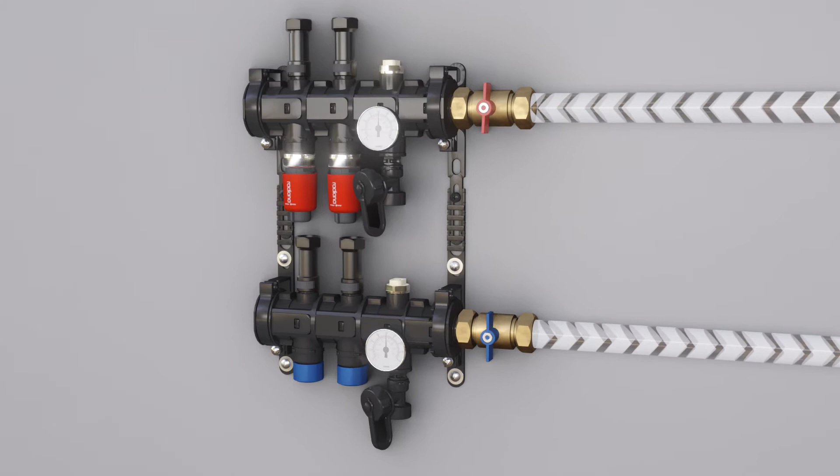The Radiana modular range of heating and cooling products comprises a full ceiling panel which can be divided into a square half panel, and a separate slim panel which needs to be divided into two slim or quarter panels. A modular composite manifold with isolation valves gives you full control over each zone. Fully insulated pipework and our unique push fittings allow for easy installation.

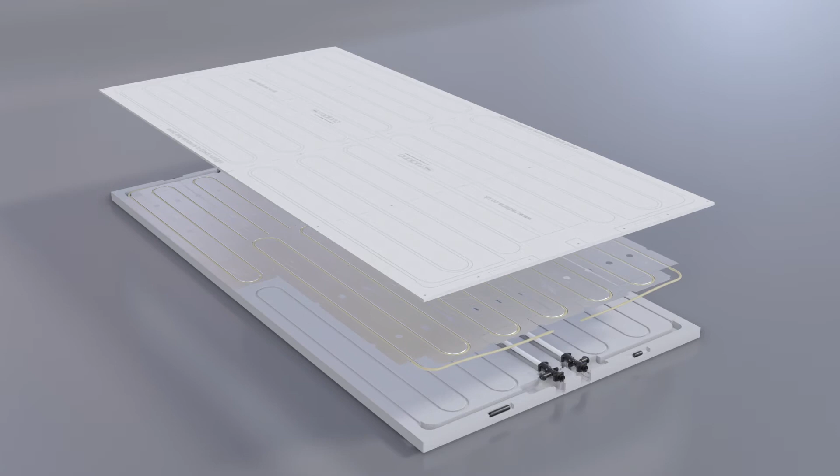Radiana provide a panel layout design service, which clearly shows the custom layout for your install and the position of each component. Each panel has integrated pipework, push fittings, insulation and drilling guides for easy installation. When your panels arrive on site, they can be cut in various ways.

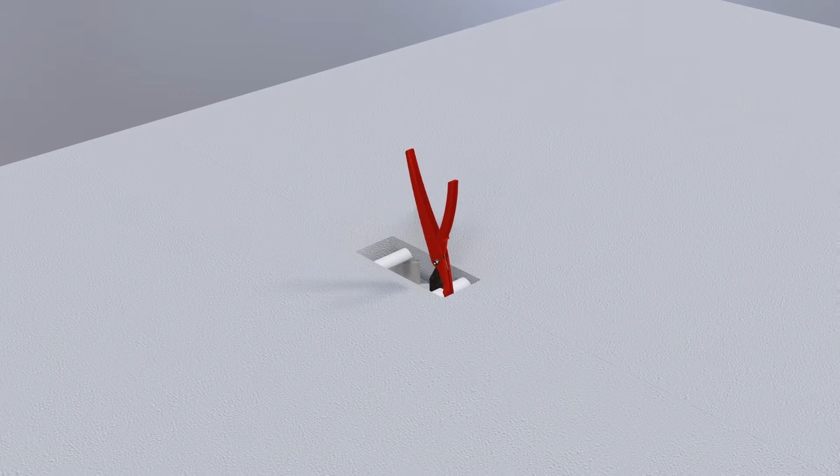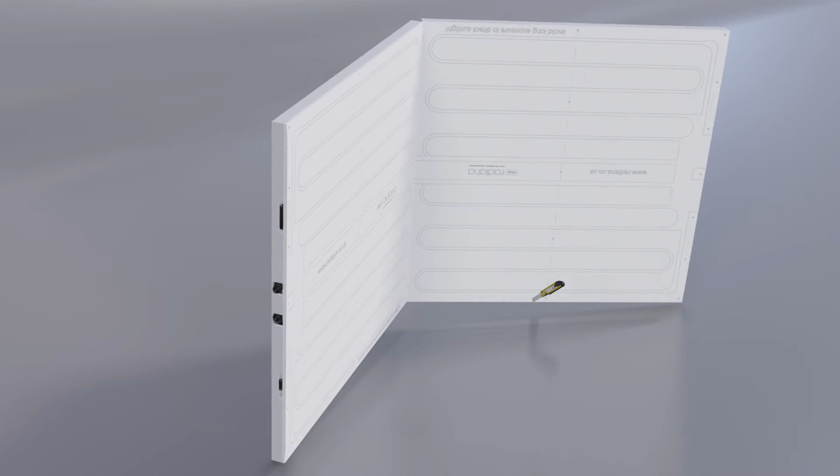The full panel can be cut in half to make two square half panels. Remove the window opening in the insulation to reveal the pipework and cut the pipework with pipe cutters. Make a pre-incision through the insulation up to the paper lining. Fold the panel away from the cut and with a blade cut along the paper lining to separate the two halves. The full panel will make two square half panels.

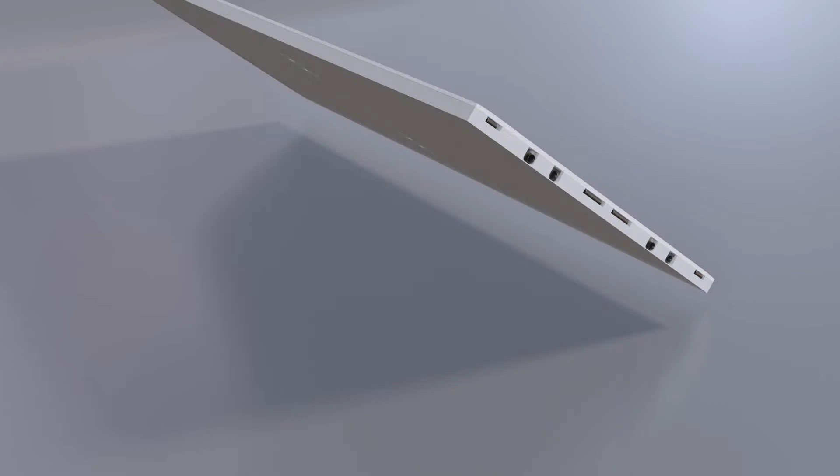The separate slim panel needs to be cut in half lengthways to create two slim panels. Without disturbing the pipework, make a pre-incision lengthways through the insulation up to the paper lining. Fold the panel away from the cut and with a blade cut along the paper lining to separate the two slim panels.

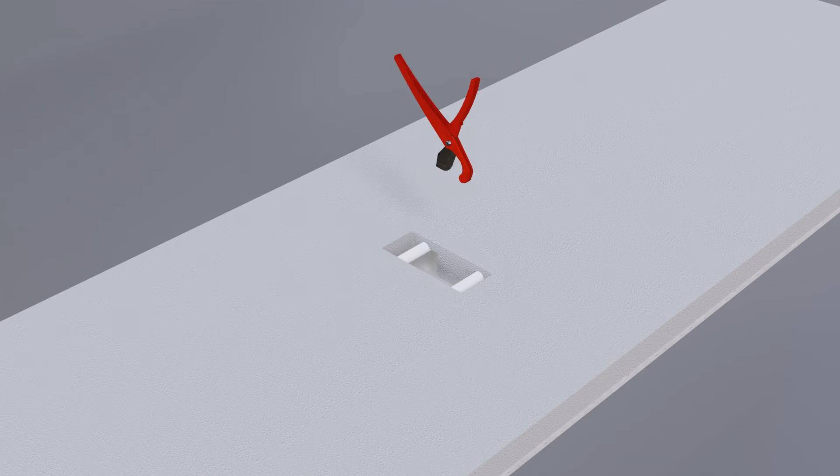To reduce a slim panel into quarter panels, remove the window opening in the insulation to reveal the pipework and cut the pipework cleanly with pipe cutters. Again, cut through the insulation to the paper lining. Fold and cut the paper lining, making two smaller quarter panels.

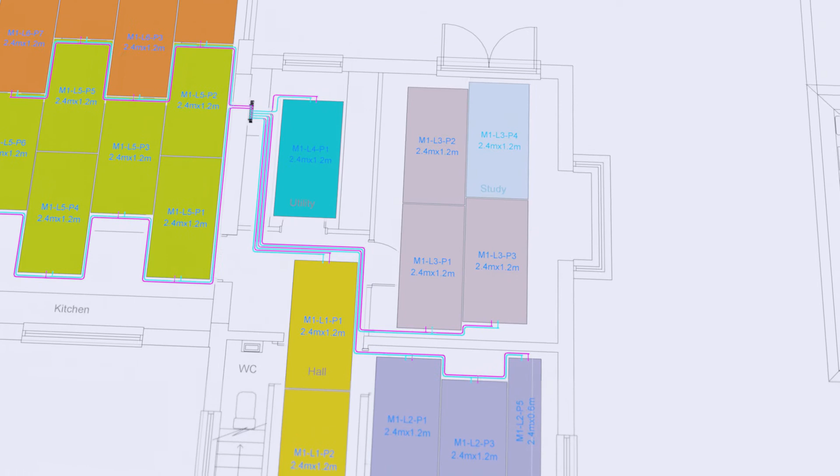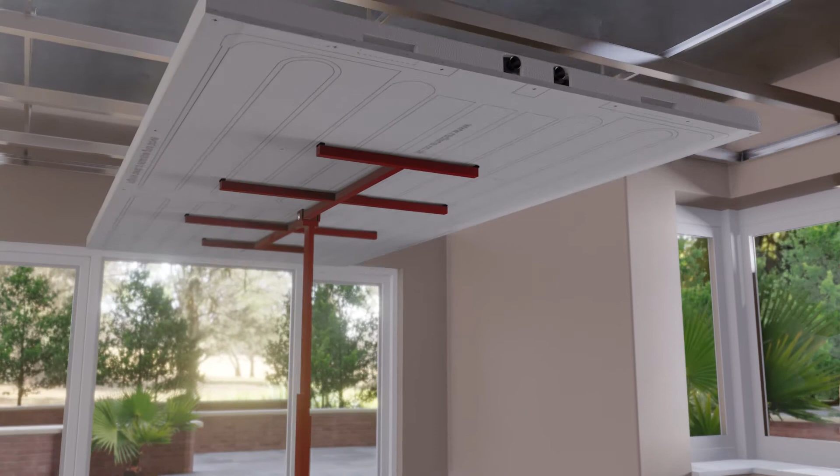Always start with the panel furthest from the manifold. Lighting and penetration layout should be planned prior to installation by the installer. Remove the artery stop plugs and push firmly into the panel pipe ends furthest from the manifold. Lift the first panel into place onto the ceiling grid and fix with 35 4.5mm by 75mm drywall screws. Make sure that the screws are evenly spaced across the panel, taking care not to puncture the marked internal pipework.

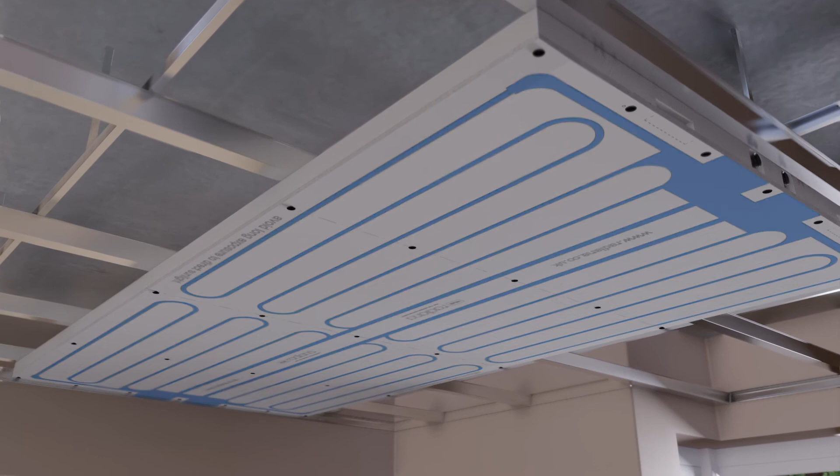The second panel should be prepared prior to lifting, with the straight-through sleeves inserted on the nearest end of the first panel. The stop ends can be disposed of. Lift the second panel into place on the ceiling grid and align the straight-through connectors with the first panel. Push the second panel to firmly butt up to the first panel. This ensures the straight-through connectors are correctly installed between the panels.

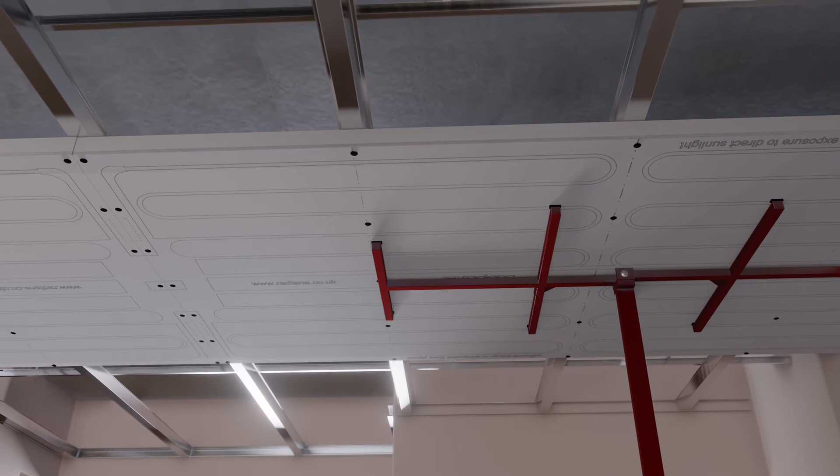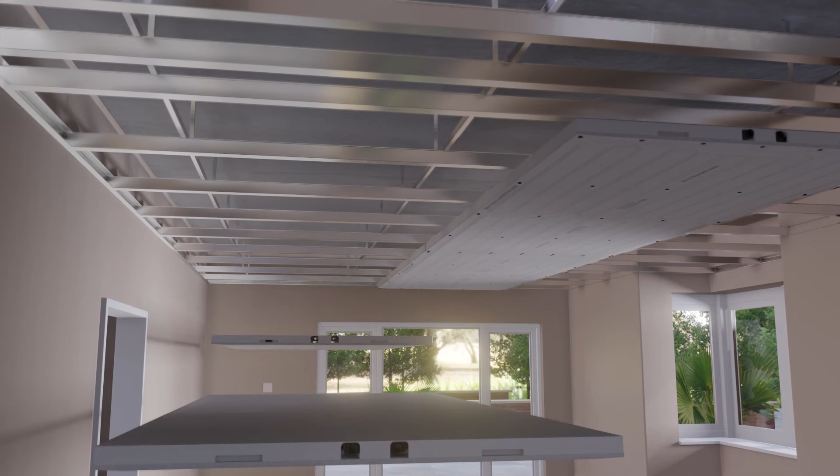Fix the second panel with 35 4.5mm by 75mm drywall screws. Make sure that the screws are evenly spaced across the panel, taking care not to puncture the marked internal pipework. Install the remaining panels in the same way. Ensure any half or quarter panels have either a pair of straight fittings or stop ends fitted, depending on the panel layout and piping route.

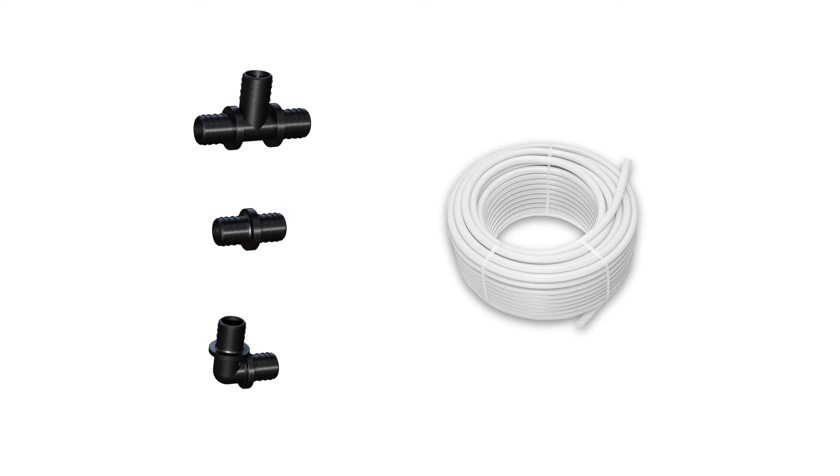You are now ready to connect the artery pipework back to the manifold using push-fit connectors and 16mm pre-insulated pipework. You can connect up to 8 full panels to one manifold port. Where zones include more than 8 panels, extra artery pipework pairs and ports on the manifold will be required. The 16mm pre-insulated pipe connects directly into the push-fit connectors within the panels.

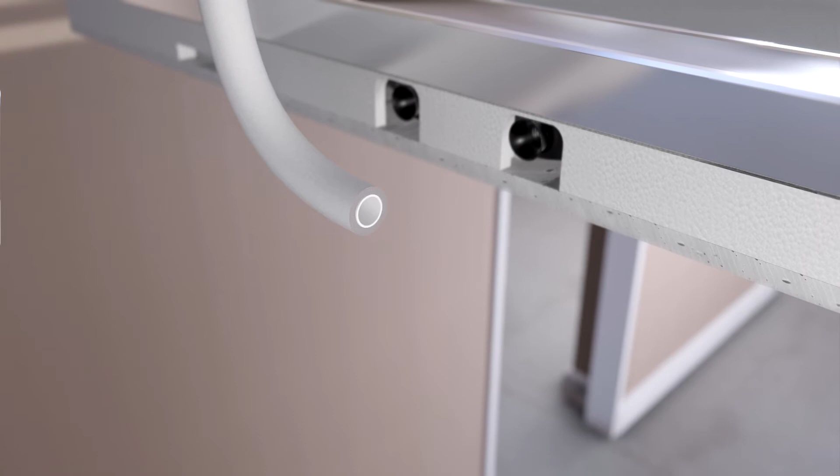Cut the insulation back from the pipe end 20mm. Ream the pre-insulated pipe. This chamfers the end of the pipe ready for installation. The pipe can be directly inserted into the panel, ensuring the pipe remains fully insulated. For any required tees, straights, elbows and end stops, we use push-fit connectors. To install these, cut the insulation back from the pipe end 15mm.

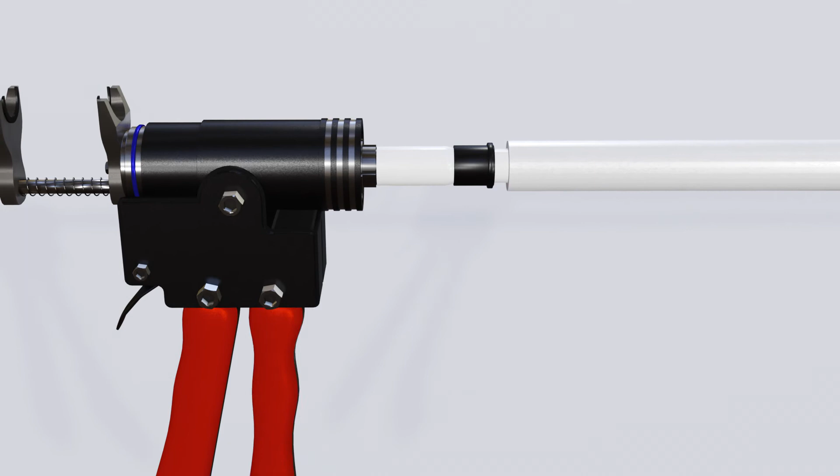Slide the pull-fit collar onto the pipe. Use the pipe expander to widen the pipe. Insert the pull fitting and using a pull-fit tool, pull the collar towards the fitting to provide a secure seal, making sure that the insulation is pushed up to the connector. All tail pipework and fittings must be fully insulated to prevent any condensation.

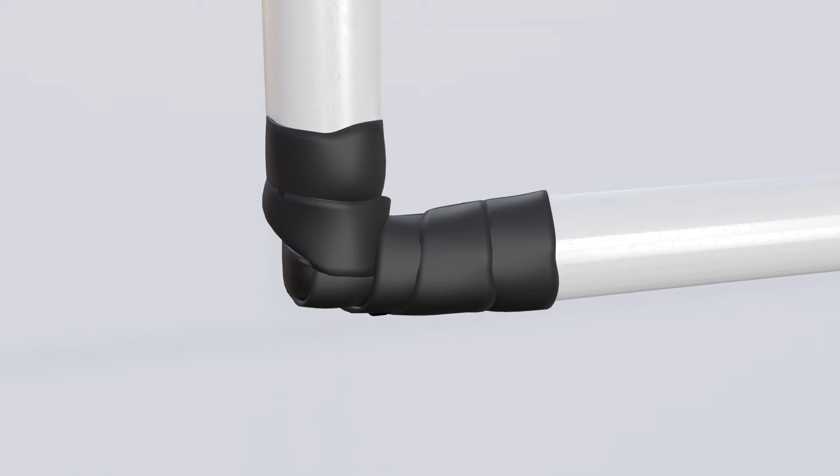Route the pre-insulated pipe back to the manifold. Cut back the insulation from the pipe end 20mm. Ream the pipe and connect the push fitting to the manifold. The ceiling manifold should be mounted in a location suitable for artery pipework to run to the ceiling being served. Space for primary pipework running to the buffer vessel should also be taken into consideration.

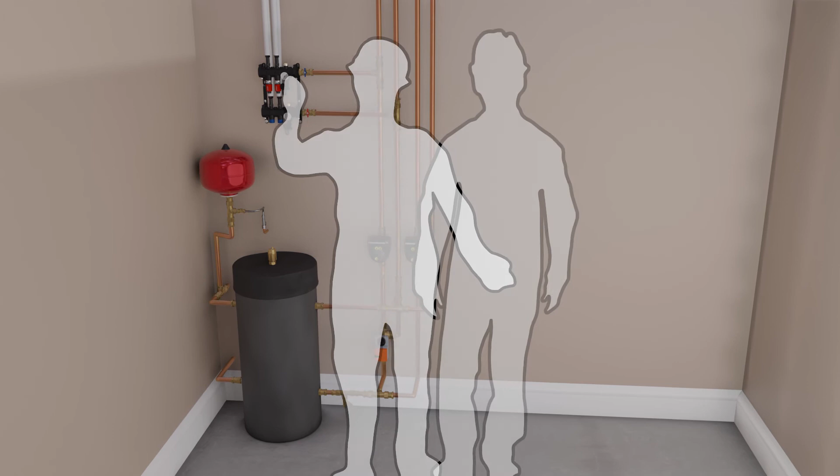Each manifold should have a pair of isolation valves connected to the primary pipework. The manifold also contains manual air vents and fill drain points. When placing the manifold, consider ease of access for maintenance, servicing, filling, flushing, and valve operation. Each flow port on the manifold will have an actuator which will be connected to the controller. Clearly label each loop for future reference.

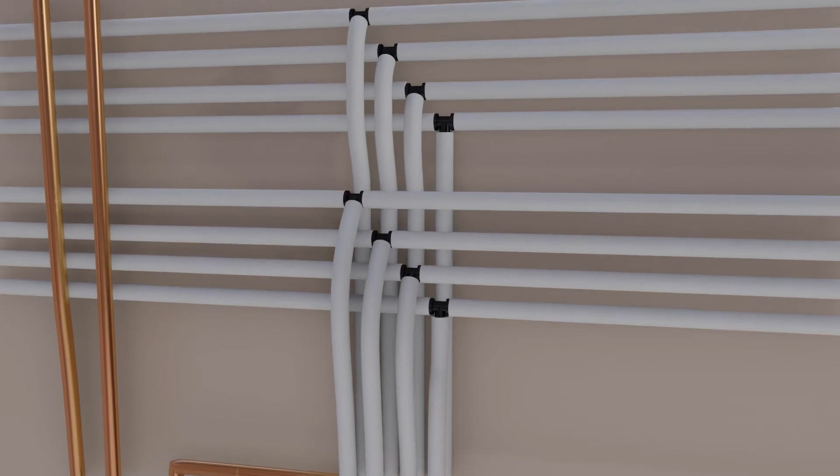If you are installing a 4-pipe system, you will have 2 manifolds supplying each zone, one for heating and one for cooling. These manifolds will have an actuator on both the flow and return. The pipework will join together for each loop within the ceiling using T-fittings before the pipework runs to the panels.

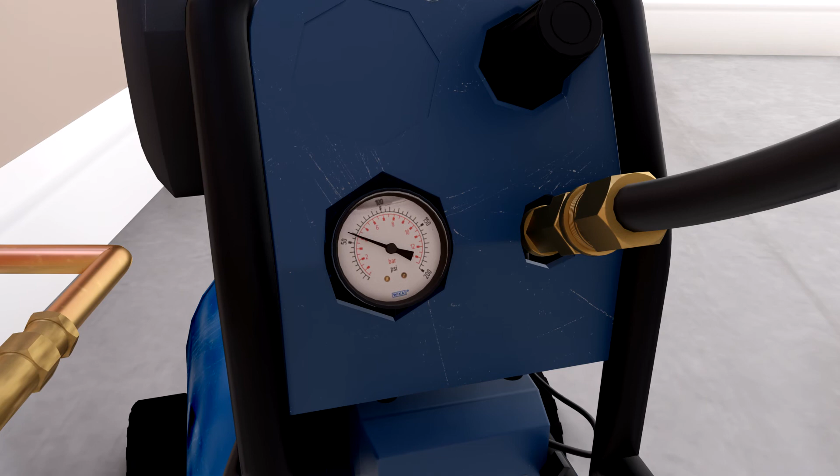Prior to fitting the non-active panels, a full system pressure test must be completed. Attach a pressure gauge to the manifold and pressurize the system with an air compressor to 4 bar. Ensure the system holds pressure for 30 minutes. Leave under pressure whilst completing any required drilling or non-active panel installation. A loss of pressure indicates a leak, which must be remedied before adding water to the system. Under normal wet use, the system will run at 1.5 bar.

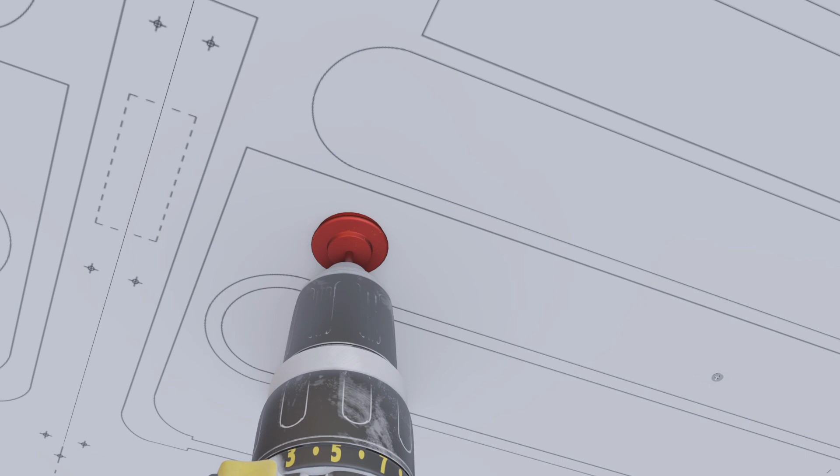Non-active gypsum panels are not supplied by Radiana. Once all active panels are installed, the remaining ceiling area can be filled with 50mm EPS insulated backed plasterboard to complete the ceiling surface. With the system under pressure, drill any required holes for light fittings. Care must be taken to stay within the pre-marked guides and not to penetrate the internal pipework. A maximum penetration diameter of 70mm in an active panel is acceptable. If larger penetrations are required, then a non-active area should be left between active panels.